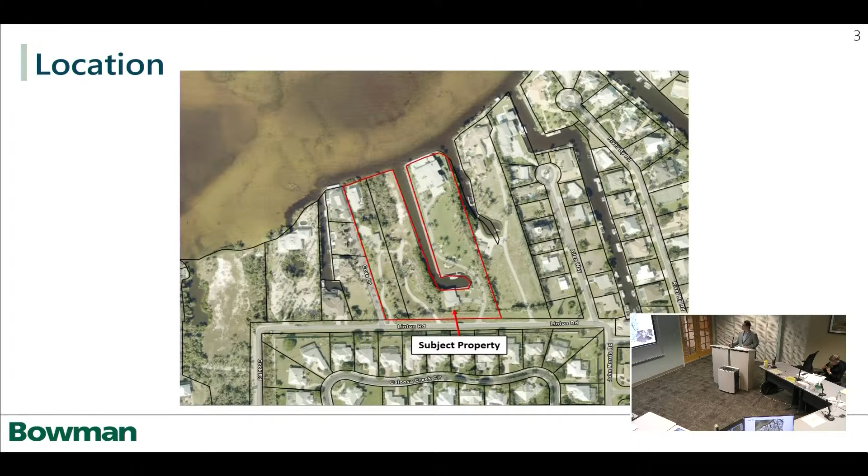The subject property and the surrounding area are designated suburban on the future land use map. This category is characterized as predominantly residential areas with a standard density range of 1 dwelling unit per acre to 6 dwelling units per acre.

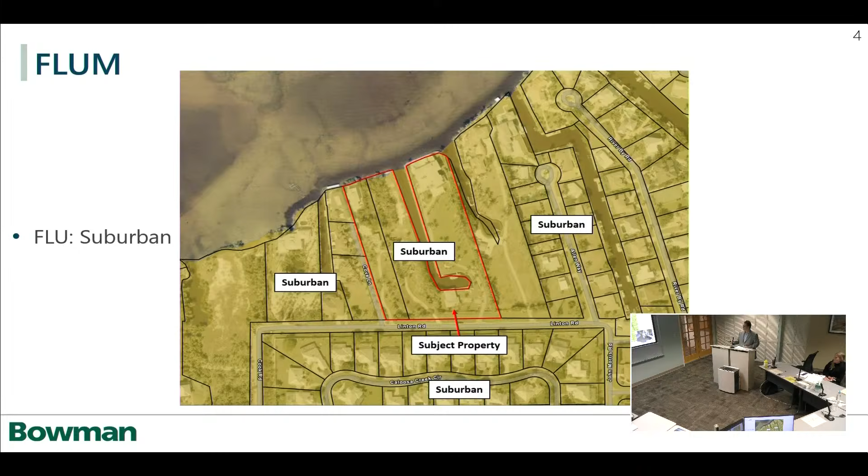The existing zoning on the site is Ag 2 and RS1. The surrounding zoning also consists of Ag 2 and RS1. And then to the south is the Riverview Lakes RPD.

This is a request to rezone about 6.18 acres from RS1 and Ag 2 to a residential planned development, to allow for a maximum of 12 single-family detached dwelling units and typical residential accessory uses, and up to 14 wet slips accessory to the proposed dwelling units. Those wet slips are not open to the public. And as you'll see when we get to the schedule of uses, there's no boat ramp permitted either, so they are fully accessory to the proposed dwelling units.

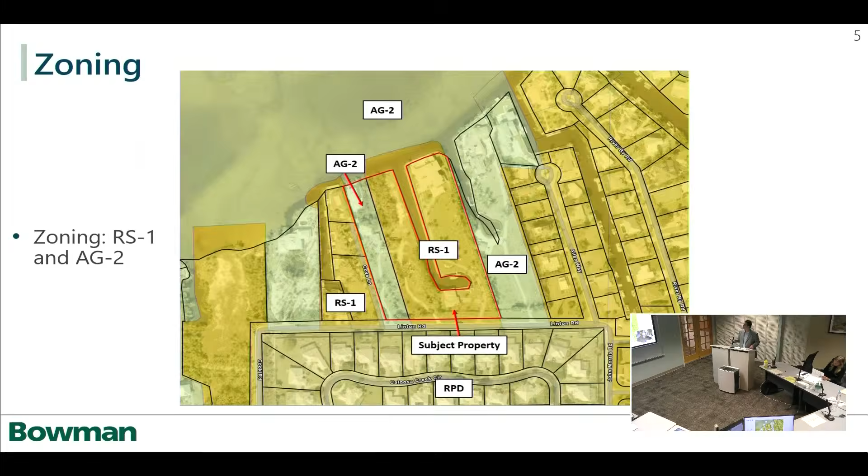So there's no boat ramp proposed. How are they gonna get their boats into the water? They have to drive a boat? They have to drive the boats to the slips and then park them in their slips. From a boat ramp somewhere else? Yes, yes.

All right, so this zoom in details a little bit more about the impacts. As you can see, there is a seawall proposed in this northern portion. Dredging will occur to allow for the installation of the seawall. Proposed impacts to mangroves at this location is about 750 square feet, and it is going to be about 141 linear feet of seawall.

By incorporating this seawall, it does allow for better tidal exchange for the existing wetlands, and there's a canal west of this as well that exists, right where that dock A is. So it'll allow for better tidal exchange and it'll also improve flushing conditions within the canal.

So these are some cross sections of the proposed impacts. Cross-section AA will show the proposed dredging, and that is the existing seawalls that are currently on site.

Cross-section BB is where the marina will go. The wetland jurisdictional line is about where the mangroves are, and the mangroves will be trimmed for alignment in this location. As I mentioned earlier, for the marina basin, most of the wetland impacts in this location were for herbaceous wetlands ground cover.

Cross-section CC shows another view of the proposed docks. Let's see, the existing mean high water line, and then they're also proposing some reef balls just underneath the proposed seawall that will create some benthic habitat and improve water quality conditions overall.

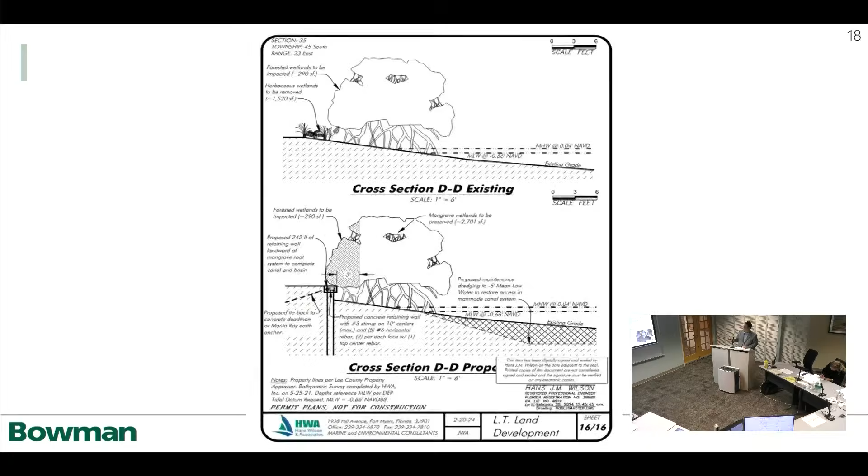For the record, my name is Charlie Krebs. I'm a professional engineer. I've been deemed an expert witness in past cases, and I'm the Director of Engineering for the Fort Myers office for Bowman. Please proceed. So the stormwater management plan -- which one is the pointer? Is there two? Left goes back, right goes forward. No, the point -- is there a light on that? I don't think there's a pointer. Oh, okay.

So the stormwater management plan is such that, as Jeremy was saying, tract A is our water management tract. The runoff from the lots goes into the roadway. The roadway then directs the water towards tract A where it is treated. Because we're in a coastal area, we do not have to provide attenuation per the South Florida Water Management District Code. Once the water is treated, we discharge that water into the roadside swales for Linton Road, using the swale to provide additional treatment through absorption because it's a grass swale, before it discharges to the end of the road where it goes into the Estero River, or sorry, Caloosahatchee River.

Okay, can you come to the map and show me exactly how it's all going to go? So the runoff runs up into tract A. Tract A gets treated, comes back down through the road to an outlet that is right here. From here, it follows the roadside swale down to the end of the road where it goes into the Caloosahatchee River. We have already been issued our South Florida Water Management permit for the site -- they've reviewed it, said it meets all of their permitting criteria, and issued the permit. That is why we've already mitigated for the wetlands impacts that are on the site as well.

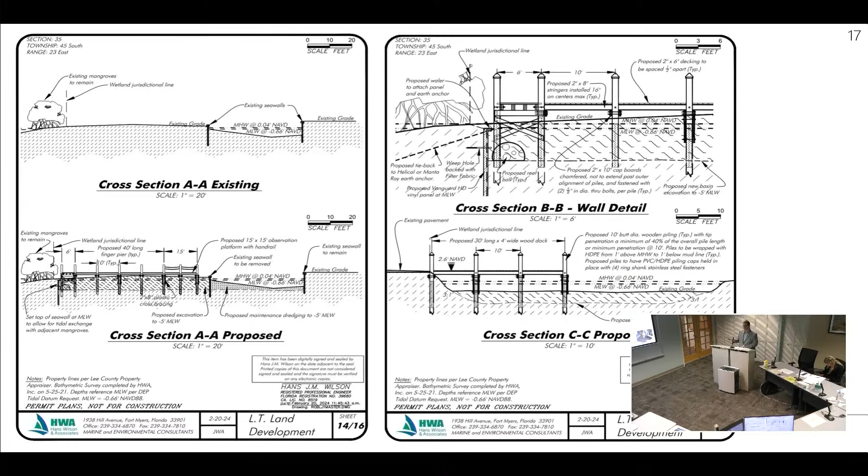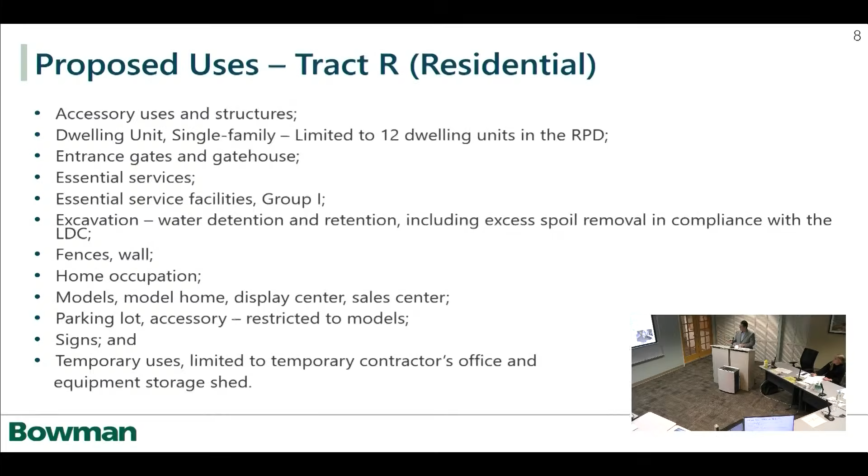Anything further? No, those are the only buffers proposed. And then, yes, we have more for the presentation.

The project is consistent with the Lee Plan, policy 1.1.5. The suburban future land use category, the proposed uses and density of about 1.94 dwelling units per acre, are consistent with the suburban future land use category. The standard density range is 1 to 6 dwelling units per acre, so this is near the low end of that range.

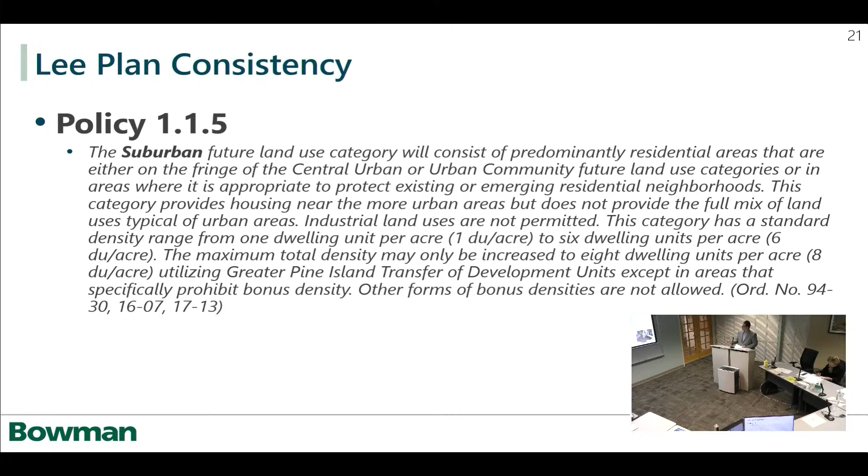The project is consistent with policy 2.1.1. It's surrounded by existing development, so this would eventually be infill development. It's consistent with policy 2.2.1. The subject property is located within a 5-mile radius of emergency services, and central water and sewer is available to serve the project.

We are consistent with 4.1.1 and 4.1.2. Again, central water and sewer is available to serve the project. Standard 4.1.3, there's no reuse infrastructure to connect to within a quarter mile. And standard 4.1.4, as Serena discussed, we have portions of the mangrove swamp within preservation areas, and we've mitigated for the wetlands impacts.

And was the testimony that you already have your ERP permit? Charlie's going to come up. Yes, we do have our ERP permit already from South Florida Water Management District. Thank you. For the record, that was Charlie Krebs.

We are consistent with policy 5.1.1. The entitlements are being sought through a plan development in accordance with this policy. Policy 5.1.2, the RPD is designed in conditions that help mitigate the constraints of being within the coastal high hazard area. Policy 5.1.7, the proposed amenities are related to and easily accessible from the proposed single-family dwelling units. There will be sidewalks along the internal roadway connecting all of the dwelling units to the amenity area.

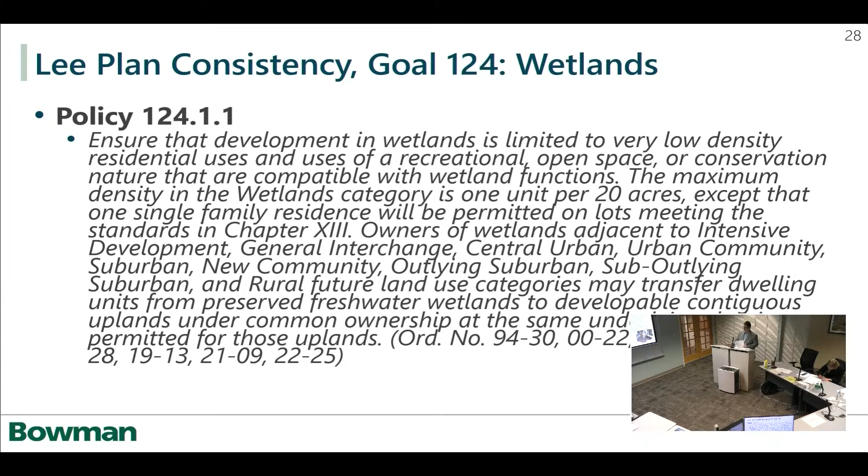Goal 125, water quality. Again, the water management systems have been designed in accordance with these policies and have met applicable state and local standards, and will meet the applicable standards of Lee County during the development order process.

Goal 128, shoreline management. The proposed wet slips have been designed in accordance with these policies, are consistent with the Manatee Protection Plan, and again, will meet all applicable state and local standards during the DO process.

We have a staff recommendation of approval subject to the conditions and deviations within the staff report. Other than some requests to tighten up the language of a couple of the conditions, we're okay with the intent of the conditions, and we had no changes to anything. It's my professional planning opinion that the proposed rezoning has met all applicable standards and is consistent with the Lee County Land Development Code, public hearing considerations, and generally accepted planning principles, is compatible with adjacent land uses, and has provided the necessary record that entitles its approval.

And with that, we'd like to open it up for questions.

Has the Division of Natural Resources approved the number of wet slips you've proposed for this project? You can come up, Serena.

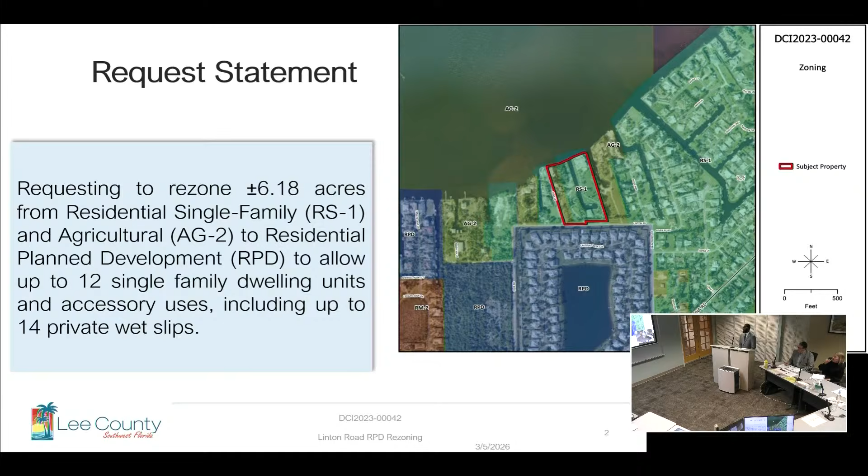The case we're hearing this morning is DCI 2023-00042, Linton Road, RPD. The applicant's request is to rezone approximately 6.18 acres from residential single-family, RS1, and agricultural, AG2, to residential planned development, RPD, to allow up to 12 single-family dwelling units and accessory uses, including up to 14 private wet slips.

Property information: the property is comprised of two parcels, 13150 and 13120/130 Linton Road. The property's total acreage is approximately 6.1 acres. The property is located in the suburban future land use category, within the Iona-McGregor Planning District, and its current zoning of RS1 and AG2 are its original zoning designations.

The parcel's history: there are 4 existing buildings on the property, 2 single-family residences, a garage, as well as a boathouse, all identified with arrows. The properties have not been subject to any zoning actions prior to this request.

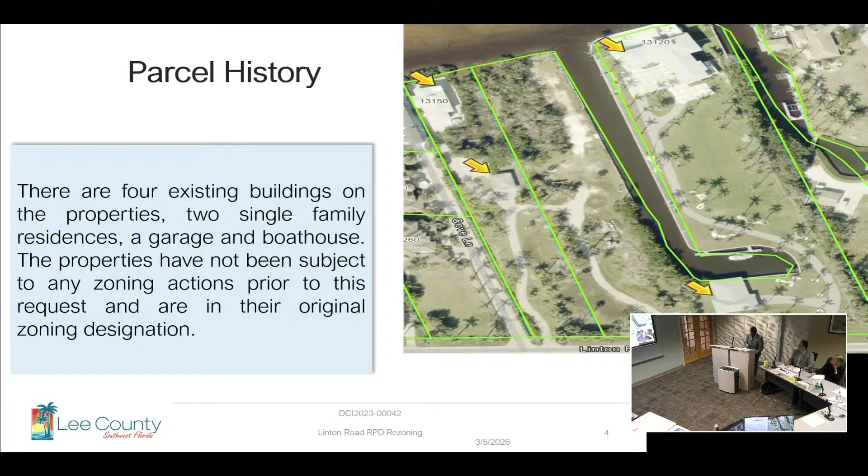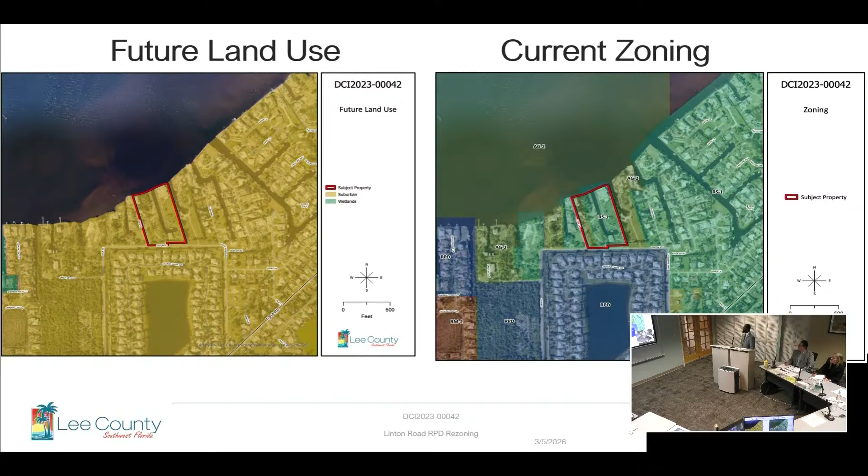These images depict the future land use category of suburban, as well as the current zoning, a combination between RS1 and AG2.

The surrounding properties: to the north is the Caloosahatchee River, noted as agricultural AG2. To the south is the residential planned development. To the east, a property zoned agricultural AG2. To the west, a parcel zoned residential single family RS1.

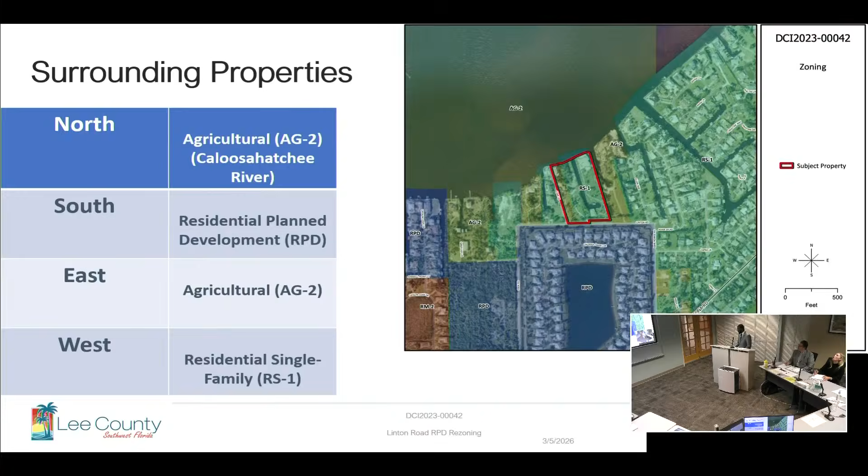This application was reviewed in accordance with LDC section 34-145, subsection D4A1, zoning matters. Throughout my presentation, I will be demonstrating compliance with these specific review criteria. In addition to the prior sections of the Land Development Code, section 34-145, subsection D4A2 for planned development rezonings also provides review criteria, and those will also be analyzed.

Zoning review criteria A: complies with the Lee Plan. My following slides will go through the analysis of compliance.

The property is located within the suburban future land use category, which is identified in the Lee Plan as Policy 1.1.5. The Lee Plan states that this category can be best characterized as predominantly residential areas that are either on the fringe of the central urban or urban community future land use categories, or in areas where it is appropriate to protect existing or emerging residential neighborhoods.

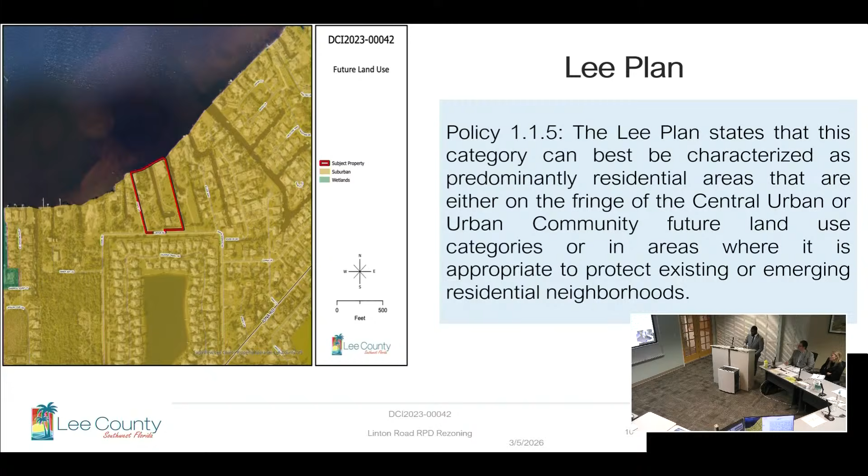Lee Plan Growth Management, Goal 2, Objective 2.1: growth management is in order to coordinate the location and timing of new development within the provision of infrastructure by government agencies, private utilities, and other sources. Objective 2.1 promotes contiguous and compact growth to contain urban sprawl. As we've seen, this area is already settled with many residential uses between the two predominant zoning districts, RS1 as well as agricultural AG2.

Lee Plan Growth Management continued, Policy 2.1.1 and Policy 2.2.1: most residential, commercial, industrial, and public development is expected to occur within the designated future urban areas on the future land use map through the assignment of very low densities to the non-urban categories. As the property is within the suburban future land use, the allowable density range is from a minimum of 1 dwelling unit per acre to 6 dwelling units per acre. As the applicant stated, the proposed density at the site is fairly low, in compliance with these standards.

Lee Plan Water and Sewer, Standards 4.1.1 and 4.1.2 speak to the requirements for properties to receive either public water or public sewer, depending on the impact they would have on those infrastructure systems. The applicant has provided a letter of availability from county utilities stating that the subject properties are located within the Lee County Utilities Future Service Area, as depicted on maps 4A and 4B of the Lee County Comprehensive Land Use Plan, fulfilling requirements for both of these standards.

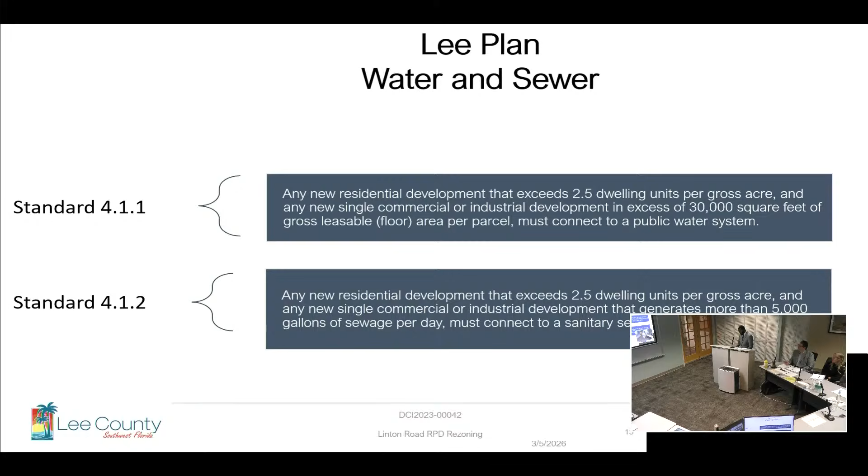Water and sewer continued, Standard 4.1.3 and Standard 4.1.4, Reuse: any development that requires a development order on a property adjacent to public reuse infrastructure with sufficient capacity must connect to that reuse system for irrigation needs. Based on the provided letter of availability, there was no mention of any reuse availability.

Standard 4.1.4, the subject property is within the coastal high hazard area. There are 3 existing buildings; at some point, 1 building is proposed to be removed, and the others will remain. The site consists of residential, mangrove swamp, and wetland scrub. Portions of mangrove swamp and wetland scrub will be preserved. Specifically, the applicant states that they are proposing, as amended, 0.44 acres of natural vegetation in the northern and southern portions of the project.

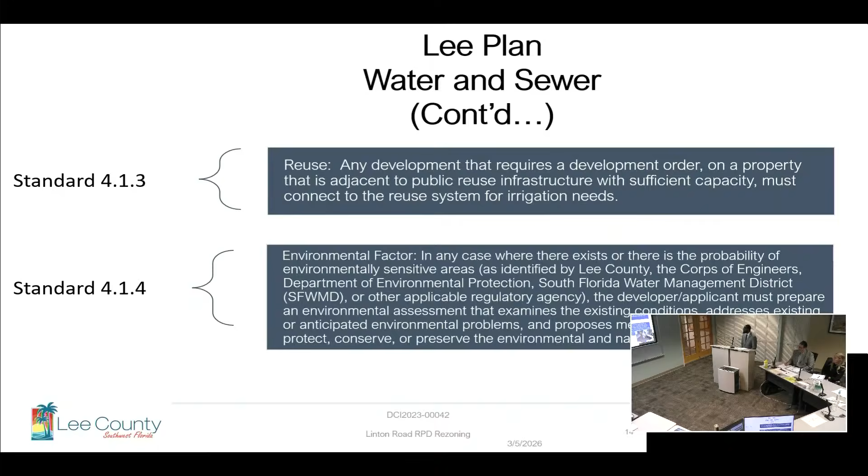Residential land uses continued, Policy 5.1.2 prohibits residential development where physical constraints or hazards exist, or requires the density and design to be adjusted accordingly. Through this policy, being that the property is within the coastal high hazard area, staff is recommending conditions to mitigate the site constraints of the subject property.

Policy 5.1.7 seeks to maintain development regulations requiring that community facilities such as parks, recreational, and open space areas in residential developments are functionally related to all dwelling units and easily accessible via pedestrian and bicycle pathways. Essentially, all of the on-site passive recreation facilities are intended to support the residential uses.

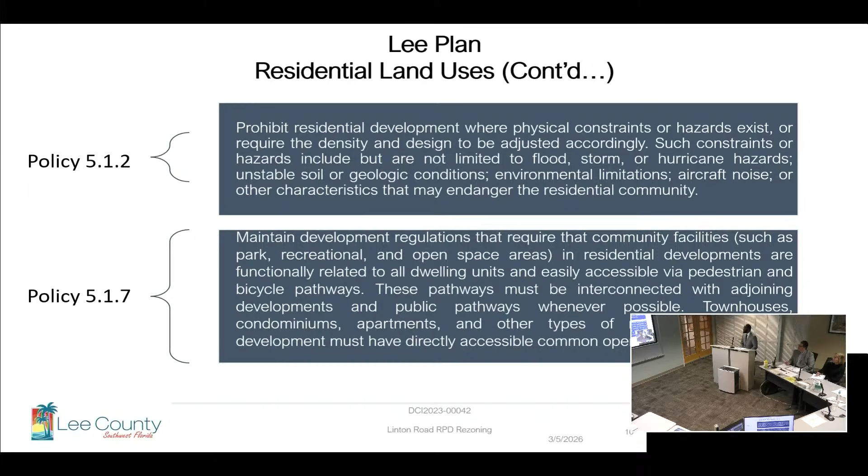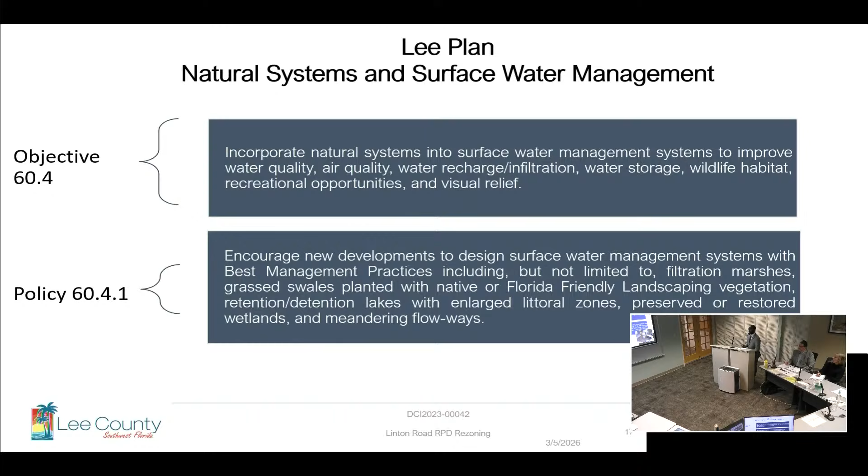Lee Plan Natural Systems and Surface Water Management, Objective 60.4: incorporate natural systems into surface water management systems to improve water quality, air quality, water recharge, infiltration, water storage, wildlife habitat, recreational opportunities, as well as visual relief. As mentioned, there are areas that will be maintained for these, as well as the applicant's proposed surface water management plan and the ways they are planning to direct the water.

Natural systems and surface water management continued. Policy 61.3.6 requires developments to provide surface water management systems, acceptable programs for operation and maintenance, and post-development runoff conditions that reflect the natural surface water flow rate, direction, quality, hydroperiod, and drainage basin. Policy 61.3.8: the banks of wet retention and detention areas must be sloped to promote vegetation growth and safeguard against accidents. Both of these have been addressed through the applicant's proposed stormwater management system.

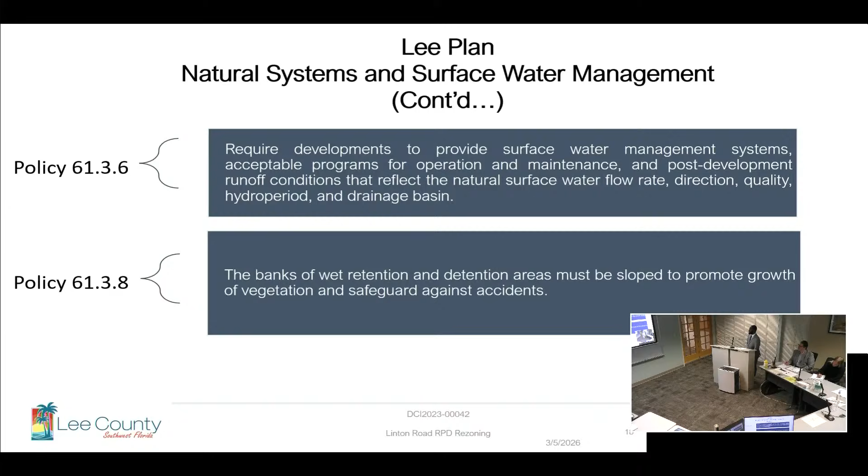Policy 61.3.11: runoff must be routed through retention or detention areas and vegetated swales in order to reduce flow velocity, allow for percolation, and trap and remove suspended solids and pollutants. Policy 61.3.12: the design of shorelines of retention and detention areas and other excavations must be sinuous rather than straight. Based on the applicant's engineer's testimony, I feel as if these policies have been addressed.

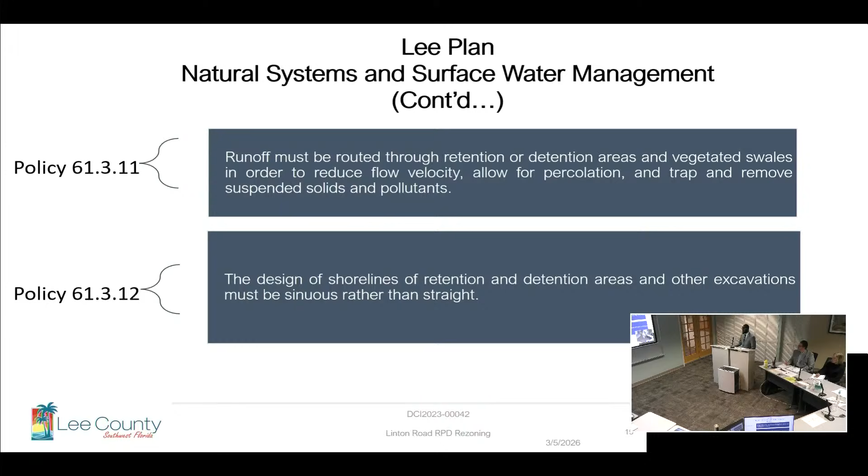Lee Plan development design requirements, Policy 77.3.1: any new development with existing indigenous vegetation is encouraged to provide half of the required open space as existing native plant communities. Policy 77.3.2: open space areas must be designed with adequate widths to preserve and allow the continued growth and viability of existing native trees.

Policy 77.3.3: the county encourages new developments to incorporate existing native plant communities and/or native trees along proposed and/or existing rights of way. As the applicant has stated, the proposed preserve areas encompass the footprint of the existing native vegetation areas and will provide adequate widths to allow for the continued growth and viability of those existing native trees.

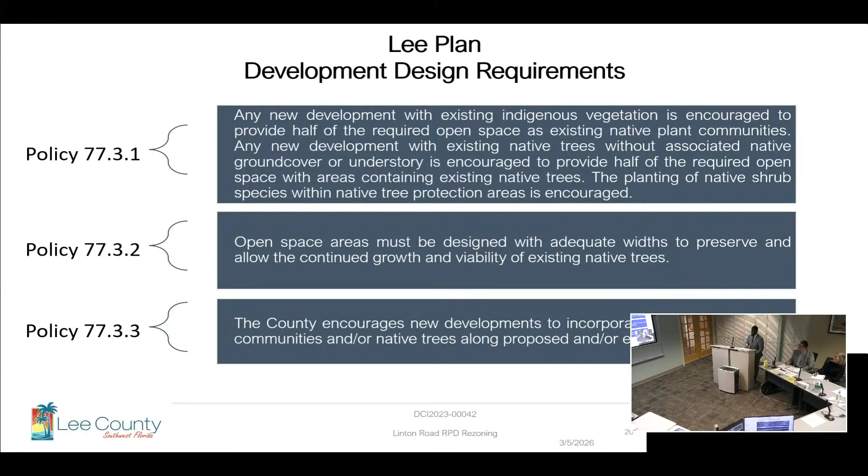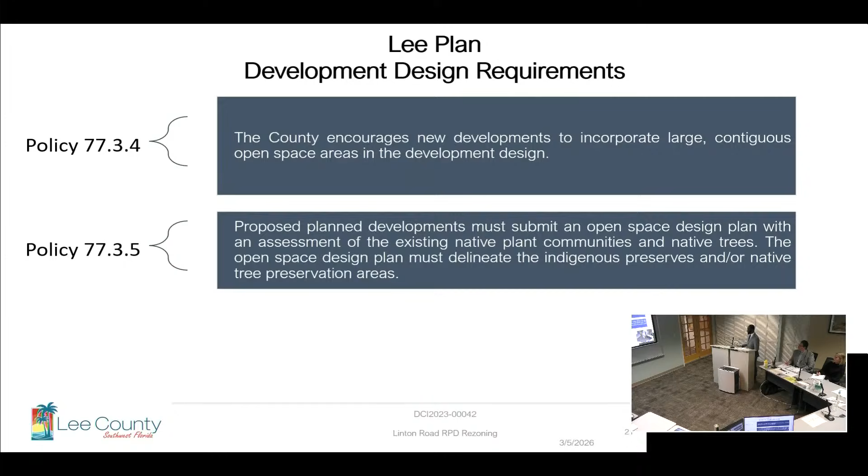Lee Plan coastal areas. Goal 101: protect human life along with current and future development from the impacts of coastal flooding. Coastal flooding includes but is not limited to high tide events, storm surge, flash floods, stormwater runoff, and impacts of sea level rise.

Objective 101.1, coastal area planning: improve the function of natural systems as a defense against coastal flooding. As the applicant has stated through the testimony of their engineer and their stormwater systems, I don't see much inherent risk here based on that design.

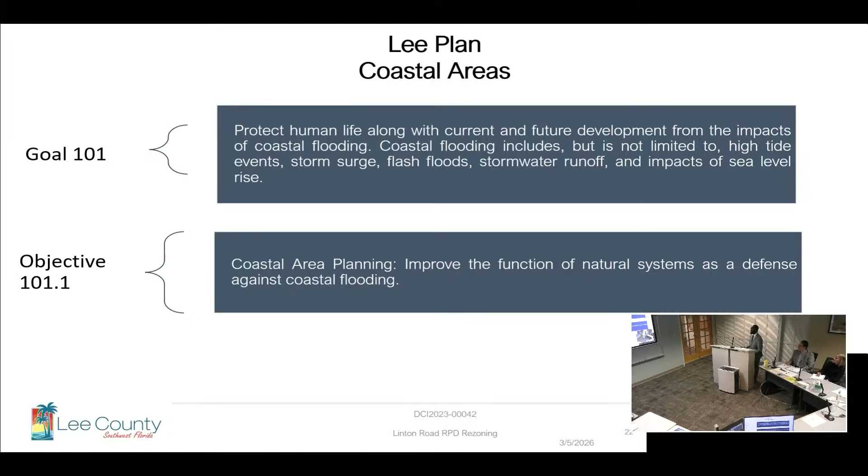Policy 101.1.1 requires that development within the coastal high hazard area be compatible with natural systems such as water retention and purification, wildlife habitat, primary productivity, and defense against coastal flooding.

Objective 101.3, development in coastal areas: protect human life and property from natural and man-made disasters. Policy 101.3.2: restrict development in the coastal high hazard area to uplands except as needed for the provision of public facilities. The applicant is proposing a development restricted to the upland portion of the site in accordance with the aforementioned goals and objectives.

Lee Plan Wetlands. Goal 124, wetlands: maintain and enforce a regulatory program for development in wetlands that is cost-effective, complements federal and state permitting processes, and protects the fragile ecological characteristics of wetland systems.

Policy 124.1.1: ensure that development in wetlands is limited to very low density residential uses and uses of a recreational, open space, or conservation nature that are compatible with wetland functions. The applicant states that most of the existing wetlands on the site are within the proposed preservation areas and that there is no development proposed within these areas.

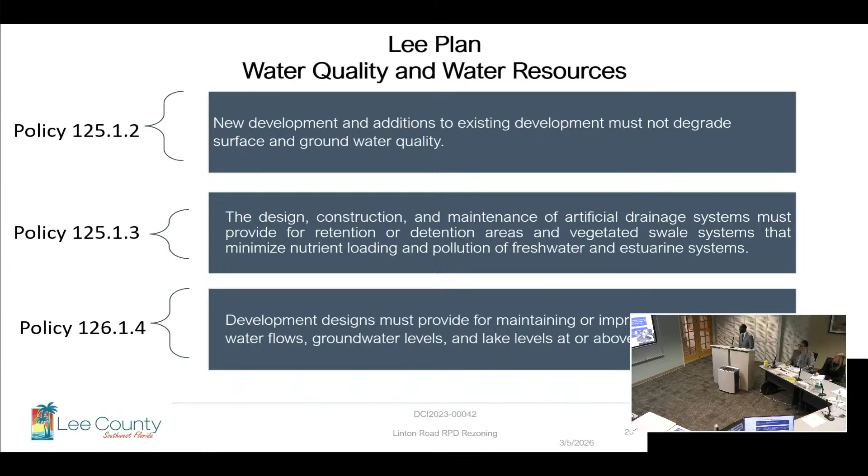Shoreline Management. Goal 128: Shoreline management, to encourage the maintenance and development of water-dependent shoreline uses and to avoid their displacement by non-water dependent uses. Objective 128.4: Marine facilities siting criteria. The county will consider certain criteria in evaluating requests for new and expanded marinas, other wet slip facilities, dry slip facilities with launches, and boat ramps in order to make efficient use of limited shoreline locations and to minimize environmental impacts.

Based on applicant's testimony, there is no negative impact to the shoreline. As they mentioned, the seawalls are proposed to be on the upland area within those mangrove areas along the shoreline. So I don't see any non-compliance with those goals or objectives.

Shoreline management continued. Policy 128.4.1: Proposed boat access facilities and expansion of existing facilities. Policy 128.4.5: New boat access facilities must be designed to avoid erosion on adjacent shorelines.

The proposed design includes a submerged seawall to allow for tidal exchange with adjacent mangrove wetlands and reef walls to address wave attenuation. In addition, the community boat access facility is located on a privately owned canal, and vessels operating out of the private multi-slip docking facility will create minimal wake energy. I find that design is consistent with these policies.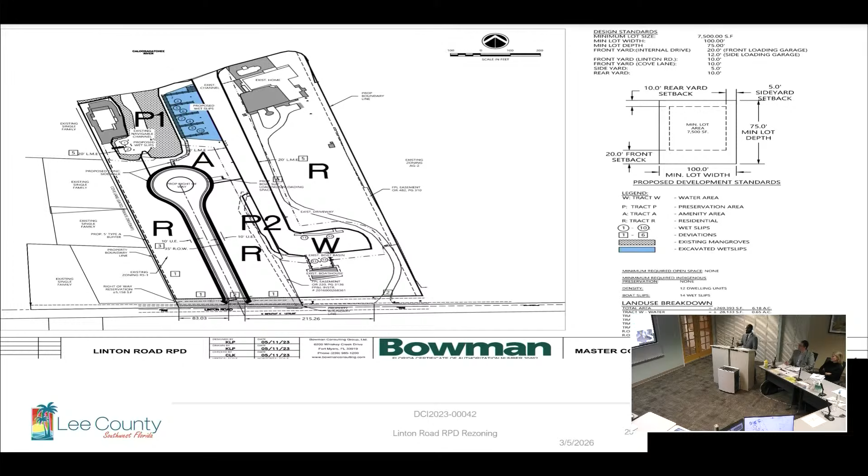Policy 128.4.8: Boat access facilities should be located in areas of maximum physical advantage. Adequate existing water depths between the proposed facility and any navigational channel, inlet, or deep water are preferred, as new dredging is discouraged. Policy 128.4.9: Boat access facility locations should minimize natural shoreline disruption.

Adequate existing water depths between the proposed facility and any navigational channel have been met. The applicant has stated that they will be performing maintenance dredging of the existing access channel to the previous permitted depths of -5 feet mean low water to restore adequate water depth to the existing marked channel. The applicant has not proposed any impacts to the natural shoreline associated with this development as proposed.

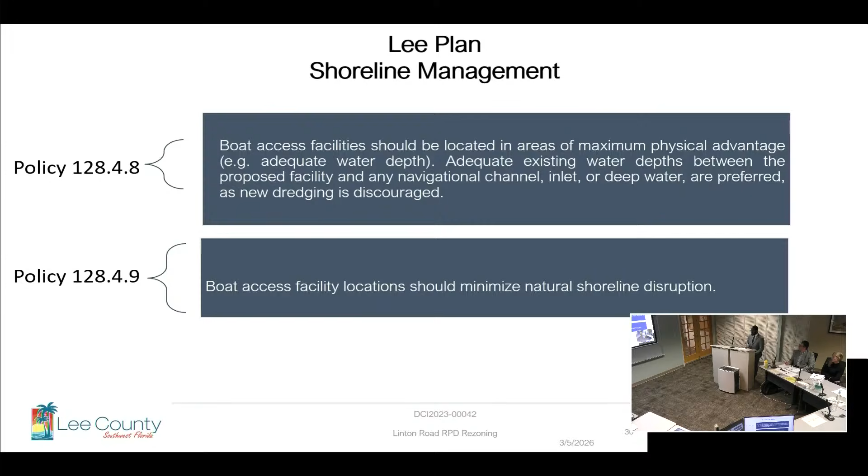Policy 128.4.10: Boat access facility construction in dead-end canals is discouraged due to difficulty in meeting state water quality standards. The proposed access facility is designed to connect with the adjacent mangrove wetlands to allow for enhanced tidal exchange between the man-made canal system and the adjacent mangroves, preserving the water quality.

Policy 128.4.11: Proposed boat access facilities must demonstrate that the site has adequate uplands to provide support facilities for all activities proposed on site without damaging or removing wetlands or rare and unique upland systems.

The applicant has stated that 9,264 square feet of impacts are anticipated on the property to accommodate the proposed boating access facility. Of those proposed impacts, 1,456 square feet are impacts on wetlands, which equates to about 16% of the total site impacts. The proposed impacts on the wetlands will allow for flushing between the adjacent mangroves and the proposed boat access facility, which staff finds to be a net benefit.

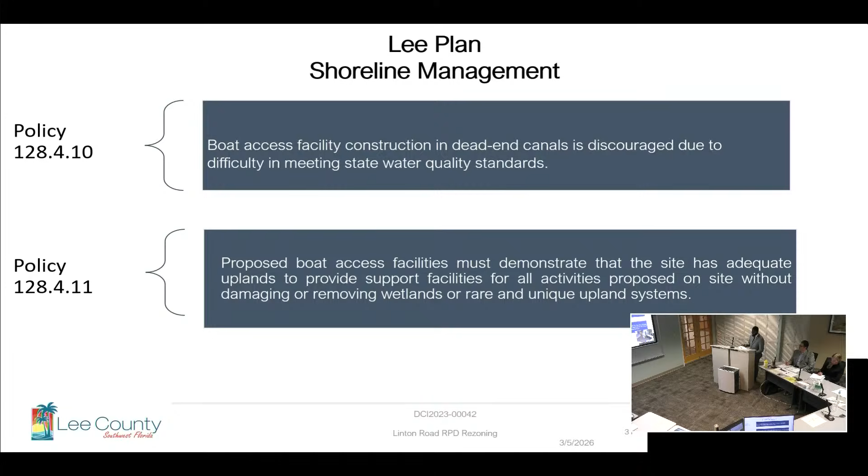Review criteria B: the request meets this code and other applicable county regulations or qualifies for deviations. The applicant has acknowledged that at the time of development, the Land Development Code and other applicable county regulations will apply. The applicant has also requested 6 deviations and has keyed these deviations to their master concept plan.

Deviation 1 seeks relief from LDC section 34.935, subsection B1F, minimum setbacks of structures and buildings from perimeter boundaries, which requires that perimeter setbacks from roads, streets, or drives must meet the standards established in LDC section 34.2192, requiring a 25-foot setback to Cove Lane and Linton Road, to instead allow a minimum perimeter setback of 10 feet where the proposed development within tract R1 is adjacent to Cove Lane and Linton Road. Staff recommends approval for that deviation request.

Deviation 2 seeks relief from LDC section 10-291, subsection 3, required street access, which requires residential development of more than 5 acres to provide more than one means of ingress or egress for the development, to instead allow for one means of ingress or egress for the RPD. Staff recommends withdrawal based on the fact that the parcel to the east is its own separate residential parcel and is not technically a part of the development of this proposed RPD.

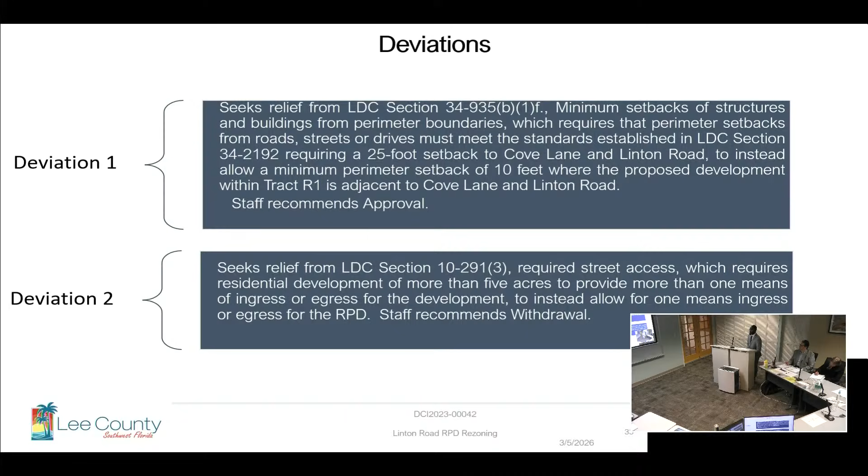Deviation 3 seeks relief from LDC section 10296 subsection B, right-of-way width, which requires a minimum right-of-way width of 40 feet for private two-way local streets with closed drainage or inverted crown, to instead allow for a minimum right-of-way width of 35 feet for the private two-way local road with closed drainage or inverted crown. Staff recommends approval to that deviation request as well.

Deviation 4 seeks relief from LDC section 10321C, crown elevation of local subdivision streets, which requires that the minimum elevation of the crown of local subdivision streets must be 5.5 feet above mean sea level datum, to instead allow for a minimum crown elevation of 3.6 feet. Staff recommends approval for that deviation request.

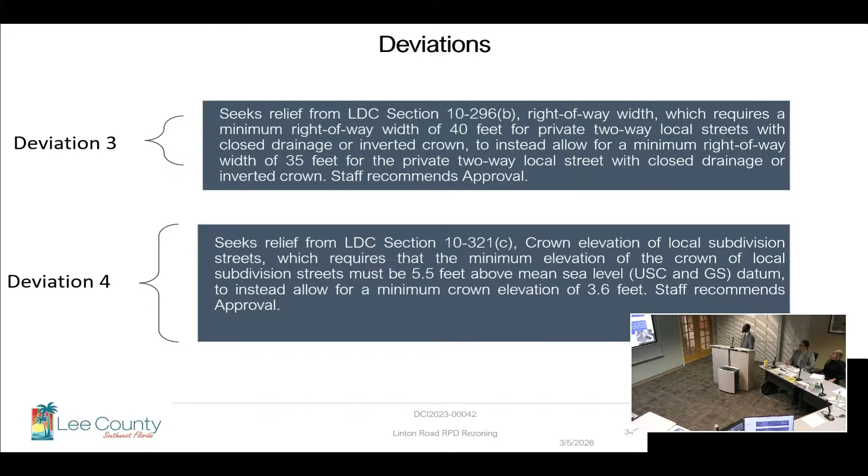Deviation 5, as reviewed prior to any changes or language updates, seeks relief from LDC section 10328A, open drainage easements, which requires that no portion of the required maintenance easement area be located within the limits of a platted single-family residential lot, to instead allow for a portion of the required maintenance easement area to be located within the limits of a platted single-family residential lot.

Currently, staff recommends denial, but as the language for that deviation request has since been amended or changed, staff is in agreement with that deviation request. Would you concur with the modifications and now recommend approval?

Yes, ma'am. Deviation 6 seeks relief from LDC Table 34-2020, subsection B, required parking spaces for non-residential uses, which requires that marinas and other water-oriented uses provide one parking space for every two slips, to instead allow for one marina loading or unloading space to serve the proposed multi-slip docking facility. Staff recommends approval for that deviation request as well.

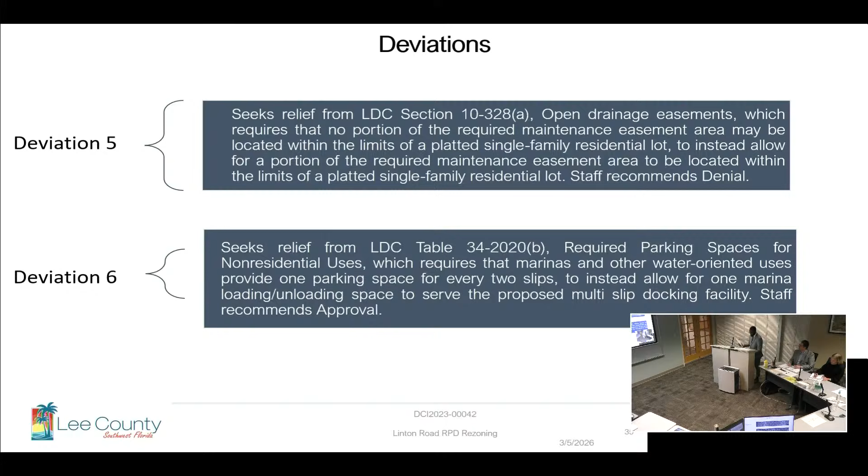Is the request compatible with existing and planned uses in the surrounding area? The property is located within the suburban future land use category. The rezone request is compatible with surrounding land uses, as the proposed development consists of single-family detached dwelling units and accessory uses to support, much like the surrounding area. The requested rezoning will not result in the encroachment of uses that are potentially destructive to the character and integrity of the existing residential environment of the surrounding area.

Does the request provide access sufficient to support the proposed development intensity? Access to the project is proposed to be two access points along Linton Road, one proposed cul-de-sac, and one existing driveway. The applicant has submitted a deviation request, but that deviation request was recommended to be withdrawn.

Does the request impact transportation facilities, and will they be addressed by existing county regulations and conditions of approval? The proposed rezoning of the subject property on the north side of Linton Road will not cause the level of service on the adjacent roadway network to operate below the recommended minimum standards as identified in the county's comprehensive plan. The proposed use will generate approximately 11 trips in the AM peak hour and 14 trips in the PM peak hour. Since the project's trip generation is less than 100 trips per hour, no intersection level of service analysis would be required. Impacts to transportation facilities will be addressed by existing county regulations and the required traffic impact statement during local development order review.

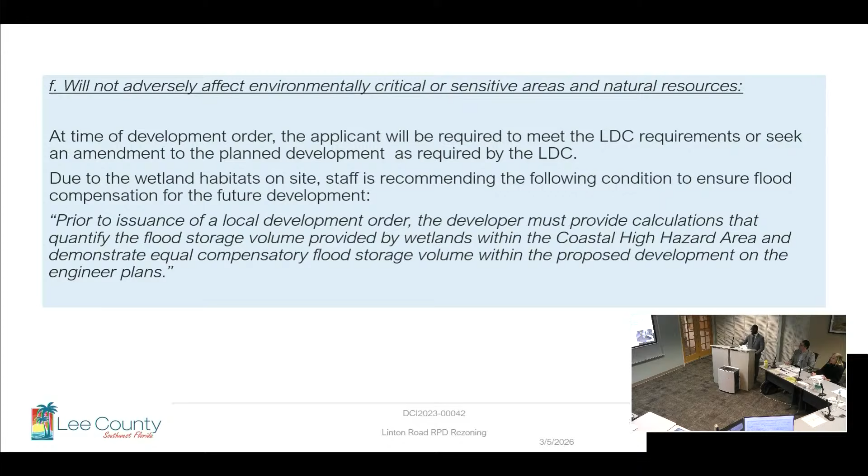Review criteria G: the request will be served by public services defined in the Lee Plan if located in a future urban area category. The property is located within the suburban future land use category, which is a future suburban area, and the following urban services are available to serve the site.

Public utilities, potable water as well as sewer, would be provided by Lee County Utilities. Emergency services could be provided by Iona McGregor Fire Station 72, located approximately a mile from the subject site. Police protection will be provided by the Lee County Sheriff Department station located at 15650 Pine Ridge Road, approximately 3.9 miles away from the subject property.

Public transit: there are no Lee Tran bus stops within a quarter mile of the subject property. Transportation: the proposed use will not negatively impact the surrounding roadway system.

Conditions as written prior may need some further clarification and/or language modifications. Master concept plan: development of this project must be consistent with the master concept plan. Schedule of uses: development of this project must be consistent with the schedule of uses for tracts R, A, and P. Property development regulations: development of this project must be consistent with the development regulations proposed by the applicant, listed as attachment C to the staff report.